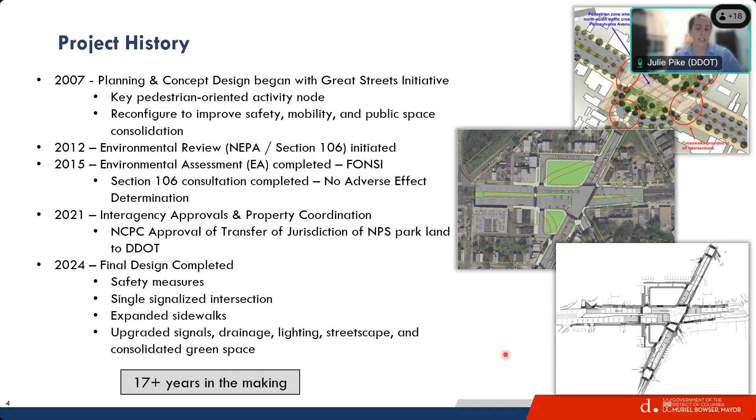So in the current design, this removes the diagonal roads and consolidates the traffic into one signalized intersection. By removing the roads to the North and South Square parks, we can create usable park space, and the project enhances safety for pedestrians, transit users, motorists, and other users of the intersection. This reduces cut-through traffic and has general benefits for residents as well as people moving through this intersection. We are also doing bulb outs to shorten crosswalks - some vital, key, important safety improvements.

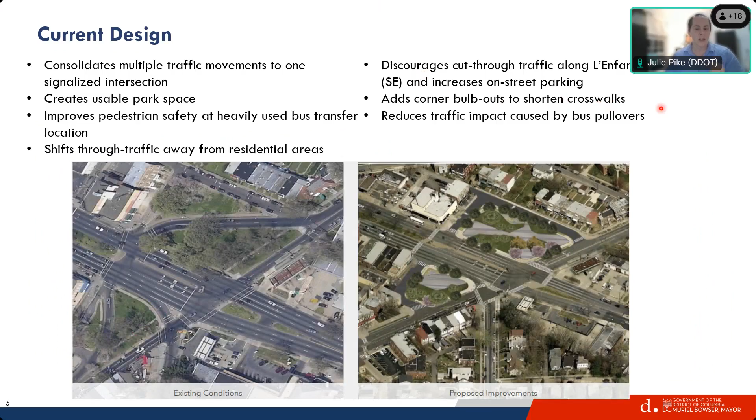So to continue the project timeline, we'll step into fall 2025. The design was years in the making and finally ready to proceed with construction. At the same time, we recognized that there was some additional information available for this intersection, especially considering recent fatalities and other crashes in this location. We used this opportunity to evaluate the project to see if there were any additional adjustments that could be made to the design to optimize safety and increase operational capacity.

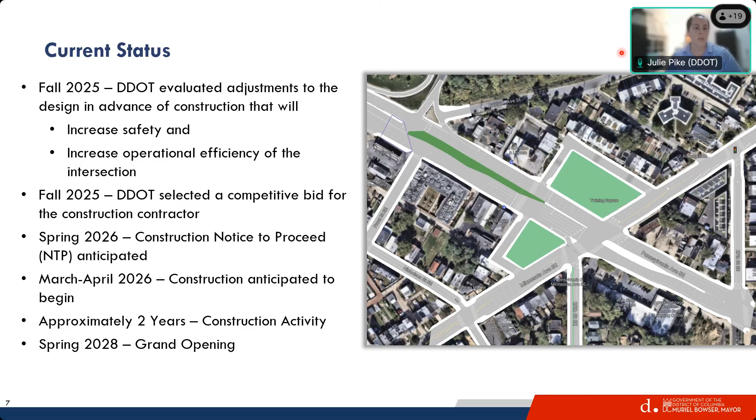Christine will dive further into those evaluations, but while the evaluations are underway, we have selected a competitive bid for the construction contractor and are moving forward with construction procurement. In the spring, we anticipate construction notice to proceed, and we expect sometime in the March-April timeframe that you will start to see improvements being installed in and around the intersection. The construction is expected to last approximately two years with a grand opening in spring of 2028.

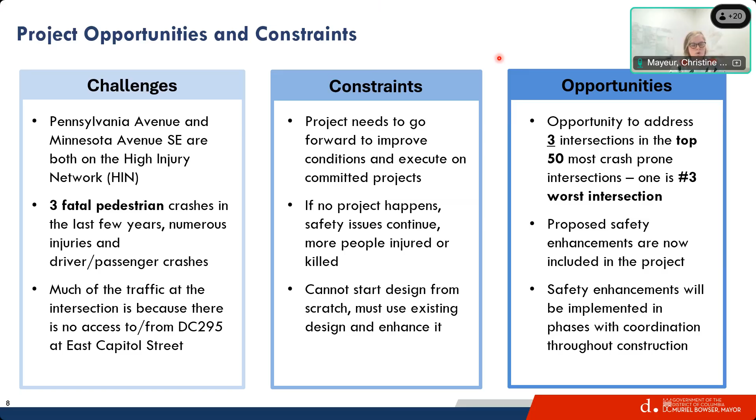The proposed safety improvements are now included in this update to the design, and safety enhancements will be implemented in phases with coordination throughout construction. So I want to walk through what those design enhancements are. Here's an overview, and we'll go in order.

First, starting with the crossing here at L'Enfant Square, where the bus stops are near L'Enfant Square and Twining Square. Then a new crosswalk we're proposing at Prout Street, number 3. Numbers 4 and 5 are related to the access management we're doing for 25th Street. Number 6 also supports all of this work by adding a new signal here in the long term.

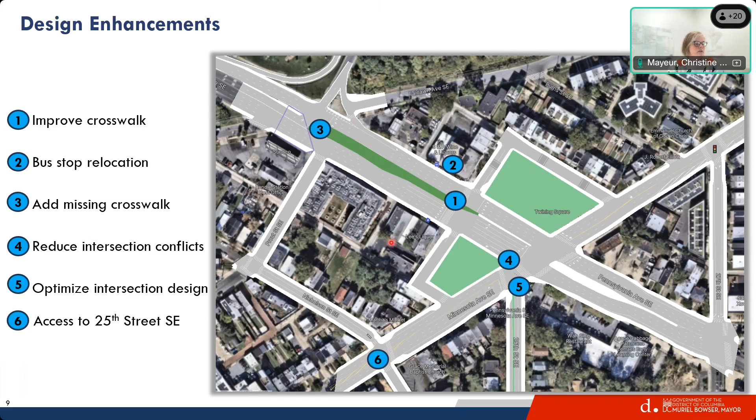Taking these step by step: number 1, in our current plan, before we reassessed the location, we had a crosswalk that was offset, with multiple steps for people to cross the street. The bus stops stayed where they were in these more constrained sidewalk locations.

In the revised design, we're straightening out the crosswalk so it functions in one single crossing phase. Riders trying to get to and from the bus stop can cross the street all in one signal phase, instead of waiting in the median section. We're proposing moving the bus stop to the other side of the park, the expanded public space, to allow more room for pedestrians and bus riders to wait.

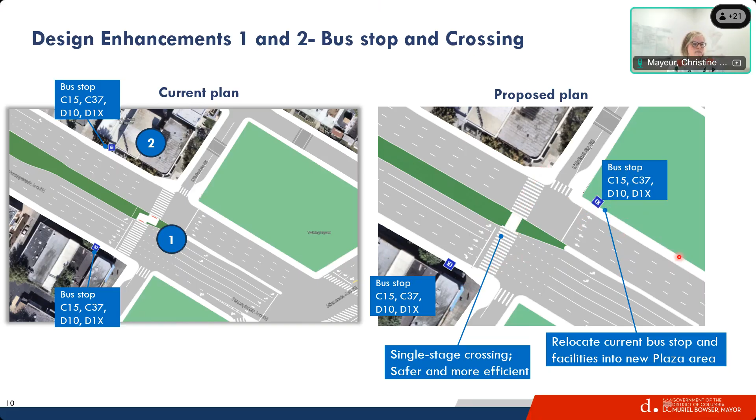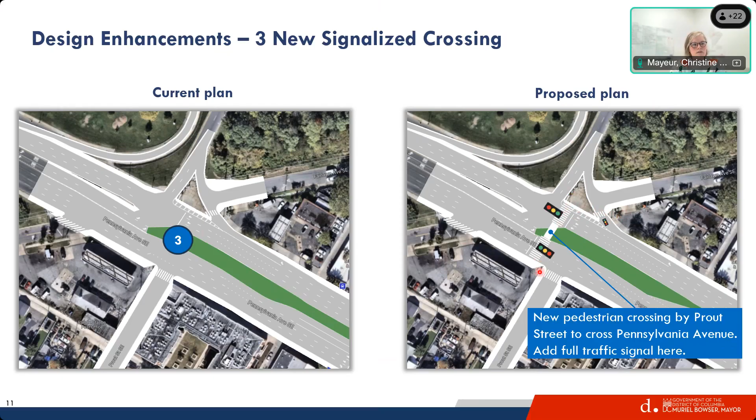In the current plan, we did not have a signalized crossing for pedestrians at Prout Street. In our revised plan, we will have that, helping pedestrians from the neighborhood get across the street and giving them another opportunity to cross Pennsylvania Avenue when needed. I also want to point out that we're signalizing the right turn lane off towards Fairlawn and onto the ramp, so this full crossing will be signalized and pedestrians won't have to contend with moving vehicles.

Design enhancements 4 and 5 are focused on 25th Street. Currently you can make the straight-through movement and then a right turn, with the right turn going through where the existing diagonal roads are. Our current plan was to keep that open.

However, taking a fresh look at all the safety issues and crashes, and also resident requests along 25th Street, we saw a lot of requests for traffic calming due to intensive commuter traffic on that corridor. So in the interim we have a couple things planned, but long term you can still make a right turn off of Pennsylvania Avenue down south to Minnesota Avenue. You will not be able to go through to 25th Street, but there are other routes and changes we've proposed to help make that an easier transition for everyone.

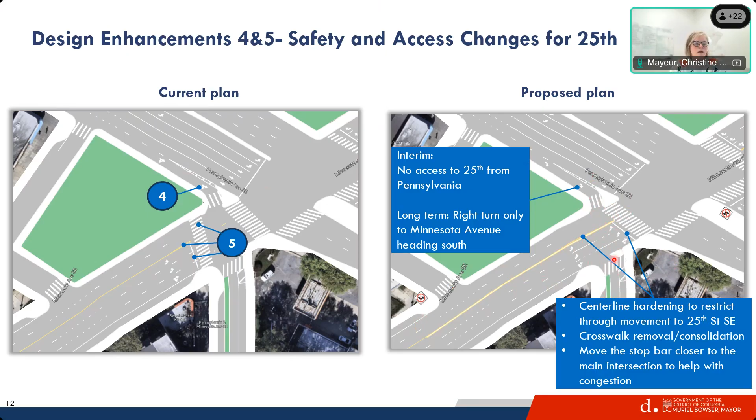This helps reduce the conflicts at the intersection and potential crashes based on the crash history we see here, and will help reduce the number, amount, and speed of traffic coming down 25th Street.

So this is what the short term will look like. What you'll see probably in the next few months is closing off of this turn lane down to 25th Street. We'll be blocking that off temporarily until the redesign happens on this side. But drivers trying to access Minnesota Avenue southbound can still take the diagonal down.

Once construction starts over here and the two-way operation is active on Minnesota Avenue, conditions will change. We're doing this because of the crash history here and the complaints and issues residents have noted to us on 25th Street. It also helps as a win-win with congestion, helping with the concerns we've heard about congestion at the main intersection of Pennsylvania and Minnesota.

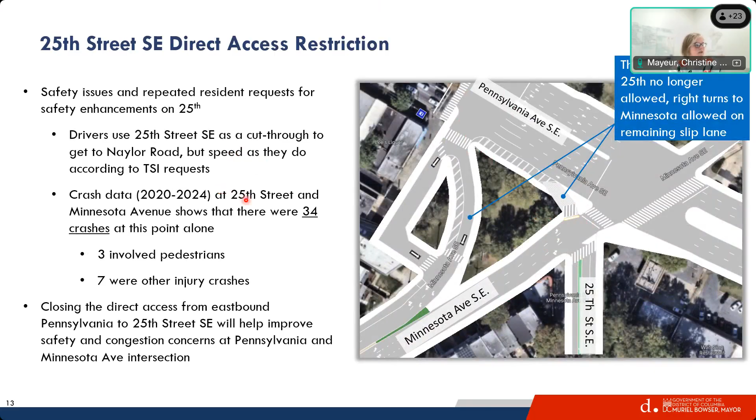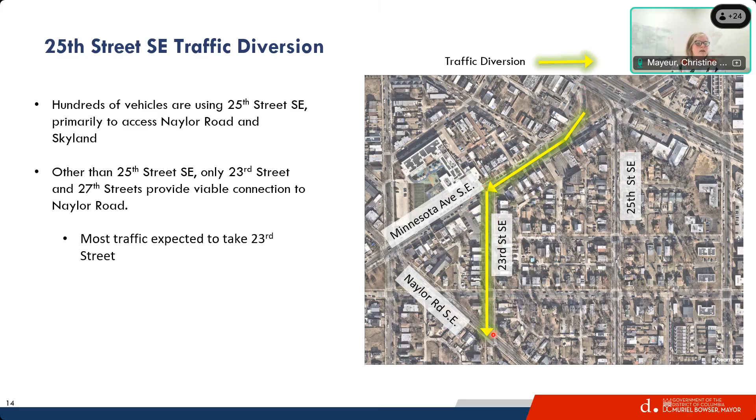So in looking at this closure, we did examine the most likely routes for traffic to divert. Lots of this traffic that's currently taking 25th Street is trying to get to Naylor Road. There's two paths these commuters can take: 23rd Street or 27th Street. Noting there's a couple signals they'll need to go through, the most likely short-term routing will be through 23rd Street south to Naylor Road, then down to Skyland.

So to accommodate this traffic so we don't increase the backups on Minnesota southbound, we are changing up the signal phasing here at 23rd Street, adding in a dedicated left turn lane, and adjusting the signal so drivers have a dedicated time to make a safe left turn down 23rd Street.

For any of the access needs at White and Nicholson Place, in the long term we're looking at installing a signal at White and Nicholson Place, and then converting Nicholson to feed Minnesota Avenue, versus its current condition where it goes away from Minnesota Avenue.

To do this, there's some off-peak parking, about 5 spaces between the bus stop and the intersection, which we'd remove so we can install this turn lane, while maintaining parking on the north side as much as we could.

With this, we will need to reroute the D10 bus. This consolidates service on 27th Street heading southbound and institutes new stops along the corridor.

So the bus will make a turn down 27th Street, turn down R Street, and then back to 25th to reach Naylor and continue on its path. Parking will be removed for these new stops and to accommodate the bus turns, but parking will be restored where the previous stops are being moved. 8 total parking spaces are needed for this bus reroute, and we've worked with WMATA, run some bus tests, and it works.

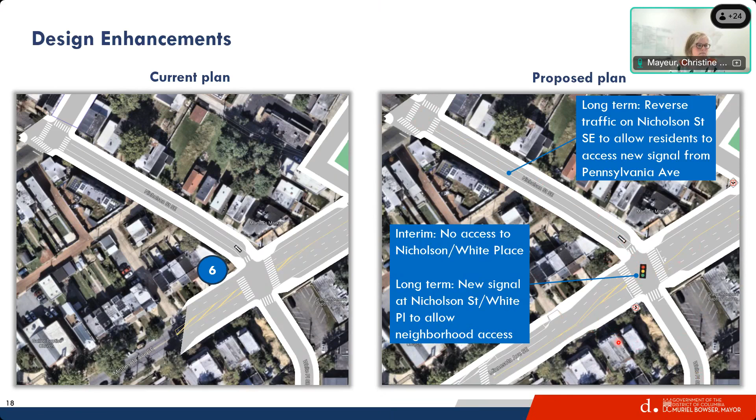Here's just a visual of that routing. Turning right off of Pennsylvania onto Prout Street, then converting Nicholson, which will then feed Minnesota Avenue with a signalized intersection. Through that signalized turn, residents can then access 25th Street this way or come through White Place.

Okay, I'll pass it back to Julie.

Thanks, Christine. So these are design enhancements that we are proposing for the Pennsylvania-Minnesota intersection project. These design enhancements may be refined depending on stakeholder and community input. We are still designing some of these, so there may be some changes.

The construction schedule is currently under development, so more information concerning the closures and impacted blocks will be coming as the construction contractor continues to develop their schedule. We do expect construction activity to continue for approximately 2 years. Because this is a high traffic volume intersection, expect longer than normal delays, and we will work to ensure there are proper warning signs and maintenance of traffic during construction.

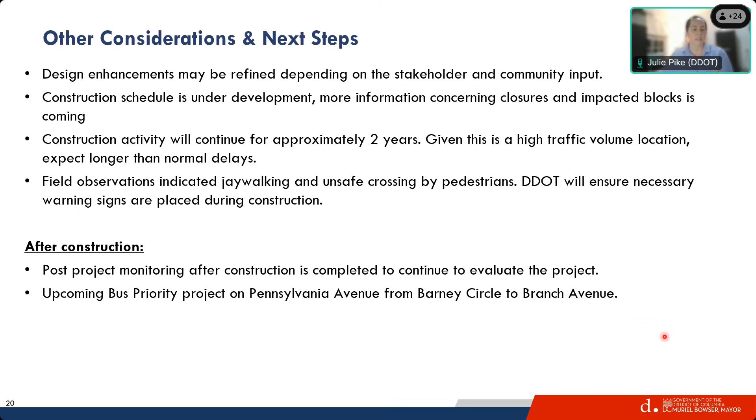After construction, looking a bit more into the future, we will be doing post-project monitoring to continue evaluating the project and how it's performing. I also wanted to note there is an upcoming bus priority project on Pennsylvania Avenue from Barney Circle to Branch Avenue that will cross through this intersection as well. That's an upcoming separate project.

And then we have some upcoming public outreach. We have an in-person public meeting this Saturday at 11 a.m. at Boone Elementary School. And then for construction, there will be separate continued construction updates as well from the construction team before and during construction.

So we expect to have neighborhood flyers, media traffic advisories, door knockers, e-newsletters, digital updates, and updates at ANC meetings before and during our construction.

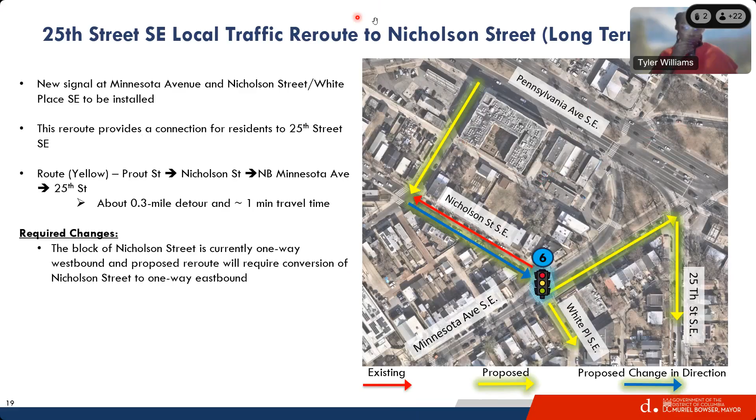I noticed that on Minnesota and Pennsylvania Avenue, if you're on Pennsylvania and you try to make a right onto Minnesota, there's a mini mart on the corner. There's the post office and some stores there, and then there's the liquor store. And one of the big problems I always see that causes congestion is that people stop in front of the liquor store just to make a quick run, right on Pennsylvania Avenue. It's not a designated parking space, it's not like it's officially a parking spot, but it happens all the time.

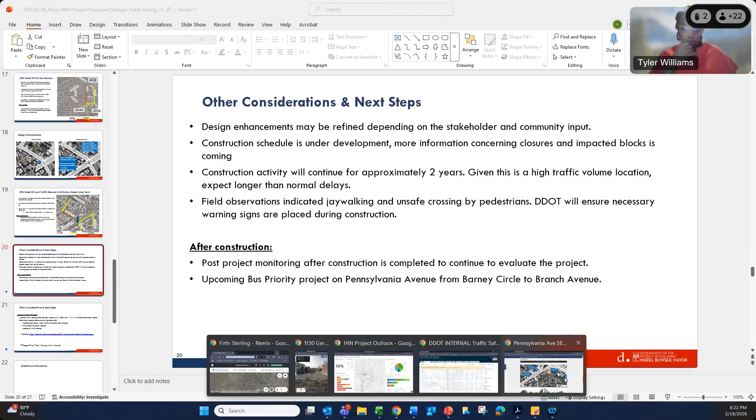I think that's one of the big concerns in that area: if you want to make a right on Minnesota, not only do you have buses that stop on the corner to pick up bus riders, but then you also have pretty frequently just people that are pulled up and parked there. So I don't know if there's a solution to that, to perhaps consider parking enforcement. I don't know, but I do think it's a big issue, exactly where you're pointing at on the map, where the post office is and there's the bus stop adjacent to it.

And then the liquor store, I think, is like two businesses down. And right there, right before the alleyway, is where cars line up, put their hazards on, and everyone else has to kind of figure it out. It creates a hazard for pedestrians because people try to swerve around and try to beat the light. And if you don't know the area well, you get confused going from turning onto Minnesota to then going up.

I think, what is it, 20? What's the other street you can go on there? Exactly, that green line there. What street is that, 25th? Yep, and so sometimes people get confused, and you're right, it is a danger there because not only do we have a lot of pedestrians in the area, but if you know the neighborhood, you've got a little bit of everything going on in that little park there sometimes, so you really have to consider that as well.

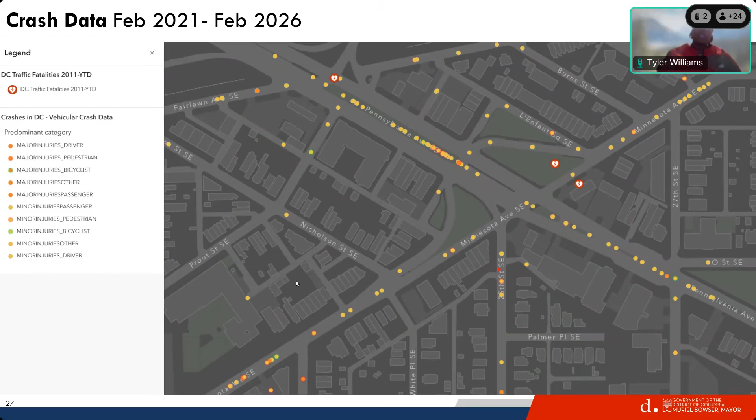I look forward to getting the link to the data. And Ms. Marsh, specifically about the BP gas station, part of the design, there are some openings in that median that's on Pennsylvania Avenue, a few lanes away from the gas station that people can typically cut through. We're actually closing those gaps, so it'll be a single connected median. That's one of the key safety improvements there.

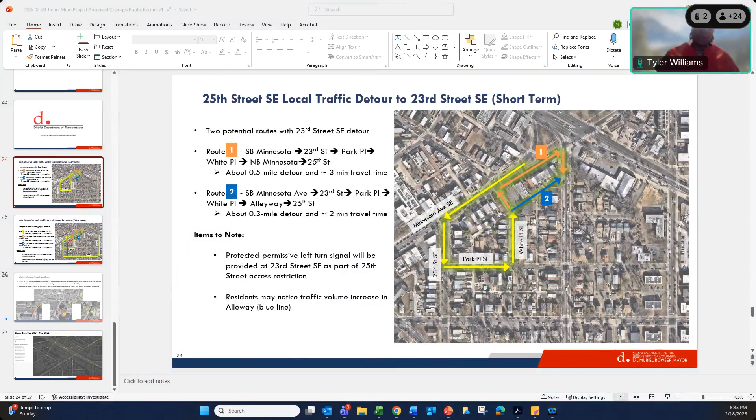I'm sorry, let me get a clarification on that. You're closing the gap where L'Enfant Square is, correct? That's what I thought I read in the rendering. That's correct. But also this white median right here on the screen.

Okay, you have to be more descriptive because I can't really see that. That's Pennsylvania Avenue median, correct? Correct. Yep. So to the left is Minnesota, to the right is Maryland, it's like going towards Maryland.

So the crash occurred with someone, they were cutting through the BP to come from Pennsylvania to Southern, or to Minnesota, or from Minnesota to Pennsylvania? It was, they were traveling from Minnesota out to Pennsylvania, coming through the gas station that way. Okay, so they actually were, yeah, I mean, that's multiple illegal moves because it's one way at that point.

But I don't know, I don't see how closing that median is going to lessen our traffic issue, given the mess that y'all made with those flex rod things or whatever. I just can't envision this. I just feel like this is just a spend-the-money project.

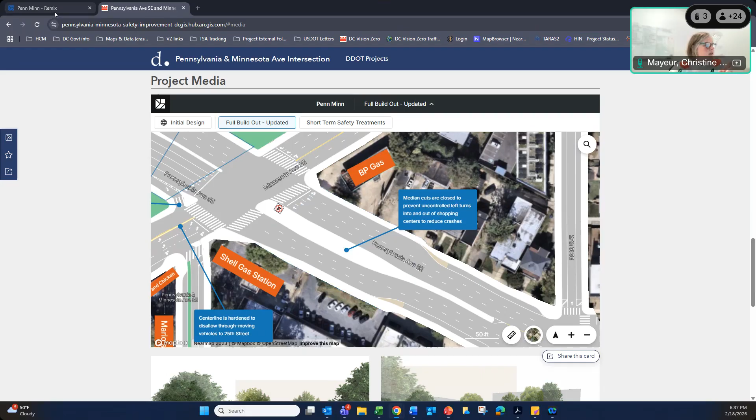So I'll speak to some of the safety improvements around this median and the reason behind it. When we leave the median open, how it is in existing conditions, let me see if I can pull up a map. Okay, I'm gonna zoom in here.

So closing those medians helps reduce the amount of crashes or conflicts that happen along Pennsylvania Avenue. We're hoping that this piece of the project will help reduce the crashes we see of people crossing over and trying to make those turns.

Well, I can see that rationale. I'm just not understanding L'Enfant Square. I have a major issue with that.

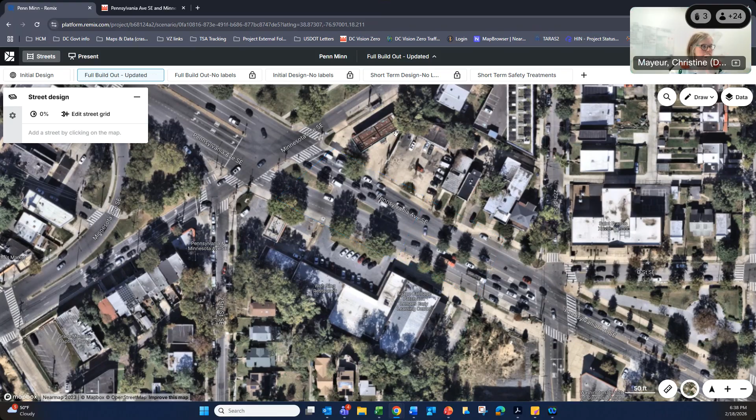Is the issue with the closing of L'Enfant Square, creating just one singular plaza? Yes.

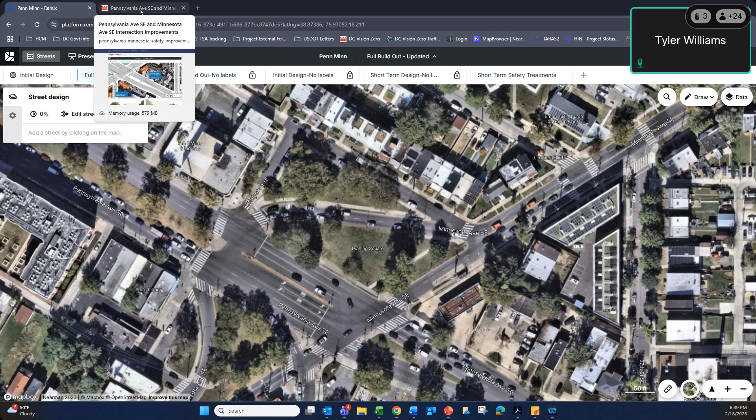Okay, you mind elaborating? I'm sorry. Do you mind just as a last point, elaborating on that a little bit more, and then we have to get to other questions? Yeah, go into the other questions. I've got an urgent thing happening here, so go into the other questions. I'll circle back. Okay. Thank you, I hope.

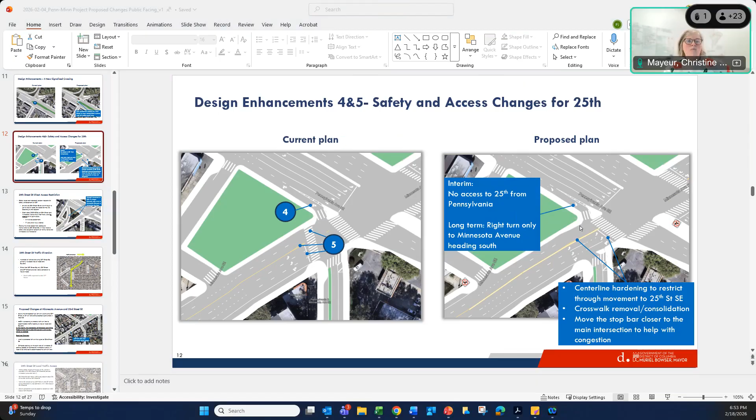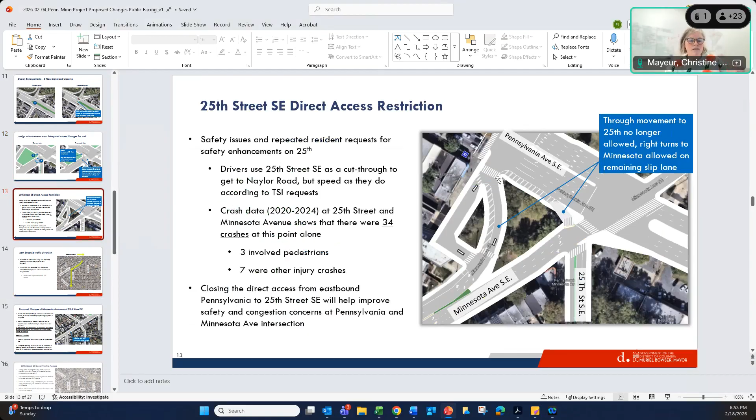We think that it's likely people will come down and, during the temporary work, might cut through White Place. So we're not changing Nicholson until we install the signal, that way those two can be coordinated together. In the interim, Nicholson will remain one way away from Minnesota Avenue, and we will put in some bollards to block people from making left turns and trying to cut down White Place. We do want to focus that commuter traffic on locations that are more equipped to handle it. Like you noted, White Place is really narrow, Nicholson is as well. So we want to focus all that commuter traffic on 23rd. If they have to come through this area, they're doing it via 23rd, not using White Place.

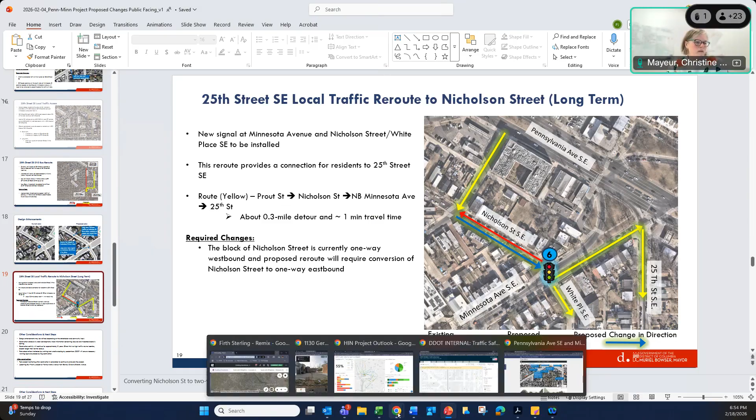Okay, because I just want to stress, I live at the corner of White and Park, and I definitely notice whenever something happens on Minnesota, people coming down 23rd Street always try to cut off of 23rd and then go through Park and White Place, and they come flying through there on this narrow street. We actually got speed bumps installed on both of them to try and slow people down. And I worry that people will continue to try things like that. Yeah, like Julie noted, we will be monitoring this during and after construction and perform an evaluation of the project afterwards, like we have been doing with all other corridor and high injury network projects.

So we'll be looking at these locations as well and also monitoring. We have the TSI program, we do still prioritize locations through that for other traffic safety improvements, but yes, we'll monitor all of these.

Okay, I want to speak for my wife and say that she will be so excited about that traffic light at Nicholson, because almost every day she goes down to the river, and every day complains about trying to get across those crosswalks and people stopping for her. Nobody stops for her. So we're huge fans of that stoplight there.

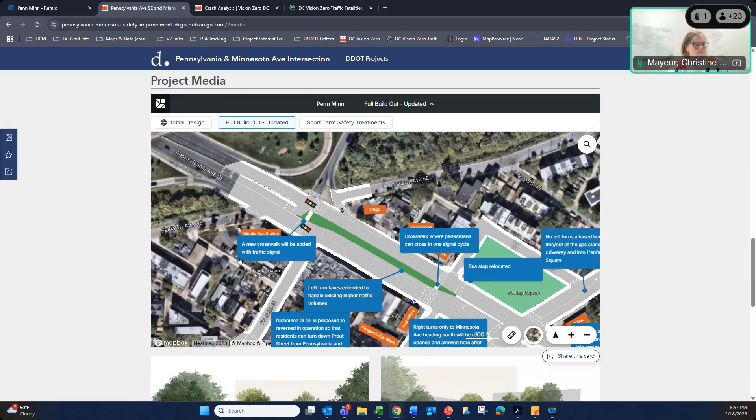Okay, last question. I bike up 25th with my toddler on the way to daycare, so I'm happy for traffic to be even less on that street. But I wonder, 27th already backs up a ton, especially during morning rush hour when people are coming down from Skyland and Hillcrest trying to turn onto Pennsylvania. So I wonder, if more traffic gets diverted onto 27th, can it handle that much?

We did a small area analysis and it seemed like northbound traffic probably wouldn't go up to 27th because, as you noted, it's already stacking up in peak hours, but may instead route down Naylor and use other larger streets to navigate through. We did notice a very high volume of left-turning traffic going north on 27th trying to access Pennsylvania Avenue, so we're trying to extend that middle turn lane, which currently can only fit about two cars, to have a bit more storage. Ultimately, we wanted to balance parking removal with traffic operations.

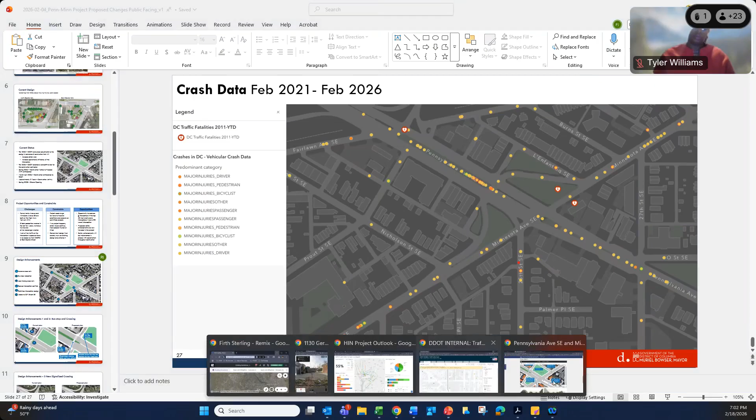Minnesota Avenue is a parking lot, right? It has become less safe since your last DDOT rebuild. So I have very little confidence that you all are going to do anything in our best interests. But I do have a specific question. You all are redirecting traffic onto streets that were not built for heavy traffic. You are also redirecting bus lines onto streets that were not built to have these heavy buses running up and down. Has there been any vibration monitoring in these communities or inspections of these homes as a result of this? That's the first question.

I take it by your silence that you have not done vibration monitoring. Thank you. Because these homes were not built for that, and the infrastructure underneath, the depth of the roadway, was not built for buses to be running up and down the street, as well as the increased traffic. And these homes will be damaged. I would advise anyone who has a home on any of these streets, 23rd Street, White Place, any of them, get your home inspected so that you can sue when the cracks start appearing. Secondarily, have you done a traffic impact analysis on these smaller streets?

I'll take that one. In looking at the redesign pieces that we're proposing here, we did look at the traffic impacts and where they were more likely. So that's what we're showing here, is that most of the traffic is likely to go down 23rd Street.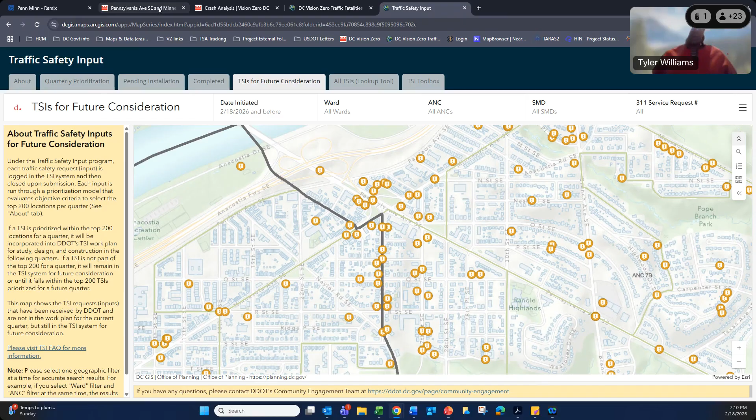Thank you. Now, also, I notice you're going to be closing up some of the cut-throughs, and you're going to make it much more difficult for individuals to get to gas stations, to get to stores, etc. Have you looked at the financial impact on the businesses in this area with all of these changes?

Which businesses are you referring to specifically? You're talking about Mario's? And there's Mario's, absolutely. You're talking about the gas stations, both the BP and the Shell. There's also usually during the summer a flea market across the street right next to the BP gas station. There are several businesses along there that will be negatively impacted, as well as the dentist and the Thai Orchid. All of these things are going to be negatively impacted by the plans that you all have.

Actually, one of our chief transportation safety engineers would like to chime in with the response.

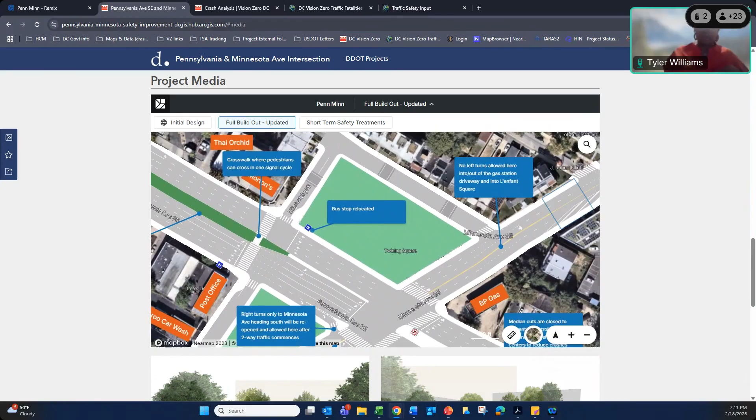Yelima, you're welcome to unmute. Hello, can you all hear me? Yes. Hi, I'm the Deputy Director of DDOT. Thank you so much for spending the time and actually coming and listening to us.

I would like to address the comment about impact to businesses, and I'm assuming economical and financial impact. DDOT's primary goal is to make sure that all modes of travel, especially the vulnerable road users who are walking and biking, are safe. That's our primary goal. We are not in the business of ensuring financial impact. While we consider that, that's not our primary goal.

In this case, one of the fatalities that happened, you're right, it did happen on a property, but it happened because somebody was trying to cut through the gas station to avoid traffic going from Minnesota to Pennsylvania. So this project will close certain medians that will not allow this illegal behavior. Yes, would it reduce the total revenue for the gas station? Absolutely, but that's okay. We'd rather not have people die. Thank you very much.

You said you're going to continue to monitor this over time. I need you to help me understand what the continuation of monitoring is. Because when we protested the narrowing of Minnesota Avenue, I was the lead person for this, and I pointed out that it was going to cost somebody their life or their property. We've had 3 homes burned down due to the fact that fire departments can't get through. Nobody's ever come back. We've circled back, and we get nothing. So what guarantees do you have, kind of like the Wendy's circle, which is still a mess after the fact, that you're actually going to change anything if it doesn't work?

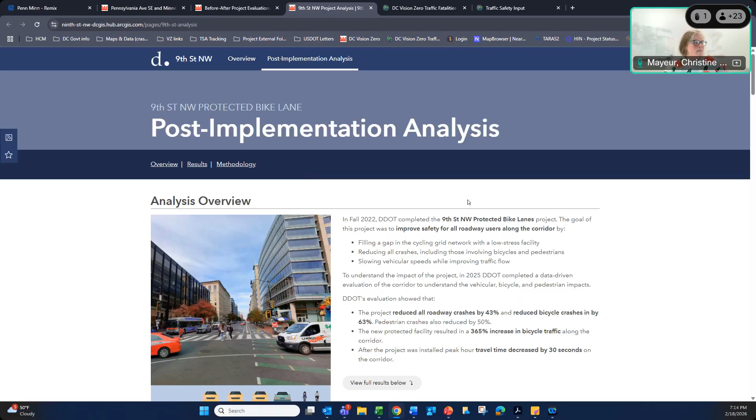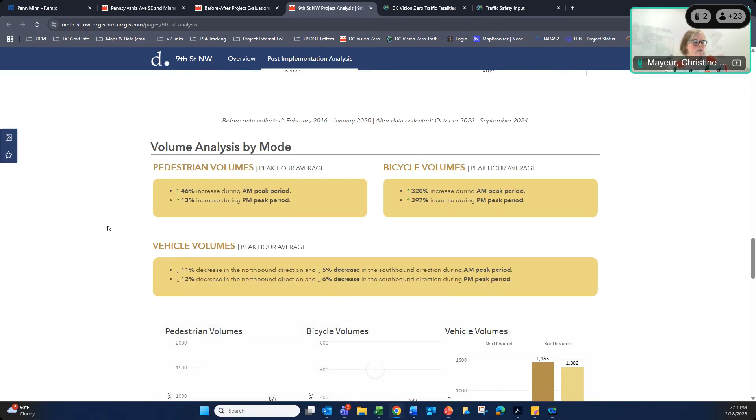Go ahead and pull up our before-after evaluation hub site. This is a website where you can look at all the projects where we've completed a study of before and after conditions to get a sense of what we're looking at. So I'll pull up one. We look through crashes, ridership, and what traffic conditions look like before and after. If it's including bus facilities, then we'll include ridership or bus speeds, and so on. It's a pretty robust process, and we'll be looking at it through all of these factors. I'll add the link to this website in the chat.

My last comment is this: I know things tend to look good on paper, but everything doesn't always work. I've spent a lot of time in school and I know theory backwards, forwards, and sideways. But I also know that things can go bad very quickly, and no matter your best intentions, somebody still may lose their life.

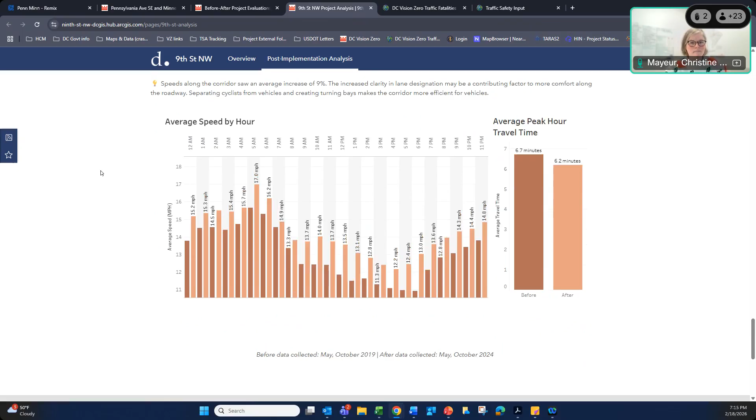Yeah, that's certainly true. We've seen it play out. We can design a road as safely as we can, and a dangerous driver comes through and harms someone. What we're trying to do here is, to the extent that we can affect this behavior and slow people down, force people to act more safely in this very multimodal, transit-heavy environment. That's our goal for this project, and then to further build on that with the bus priority project that's coming through.

Okay, well, I thank you, appreciate it very much. I'm sure the businesses will be glad to know you guys don't care.

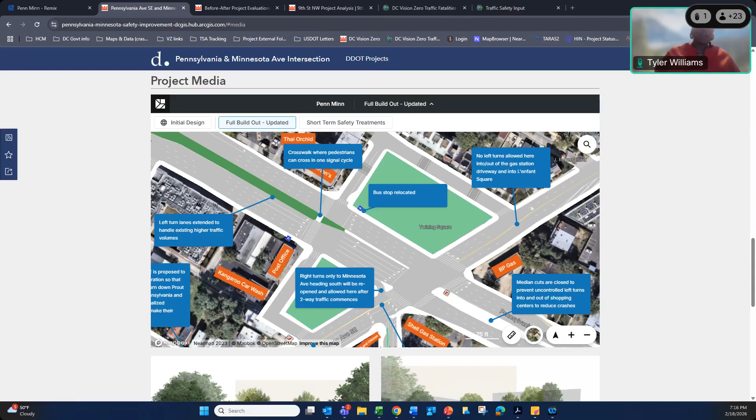Tyler, if you're talking, I think you're on mute. Oh, my apologies. I think there's one more hand raised, and I think I just gave them permission to unmute. I believe the name is Tuan Bo. Hello, thank you. Hi, Tyler. How are you? I'm good. How are you? I'm doing okay. Just trying to make this as quick as possible. There's a lot to digest here. There is a lot.

So I can understand Minnesota Avenue. Currently on the south side of Pennsylvania Avenue, I think it's 3 lanes wide, with one being parking available. And I think on the north side, it's 2 lanes in front of the BP. So let me pull up a map for you, wait, okay.

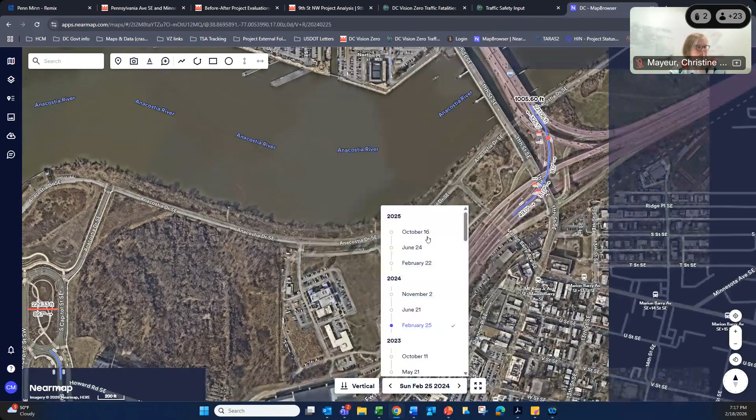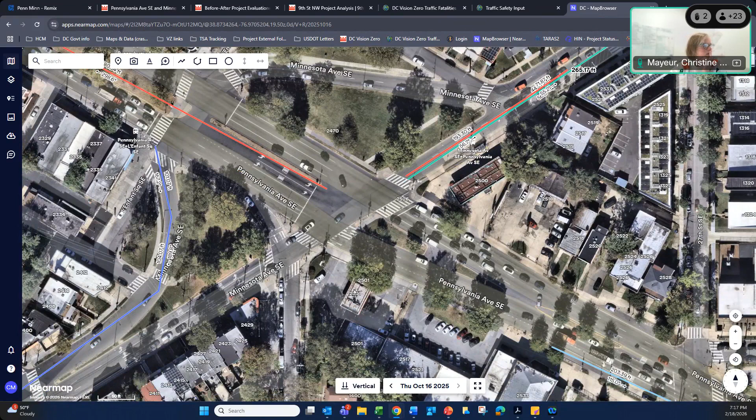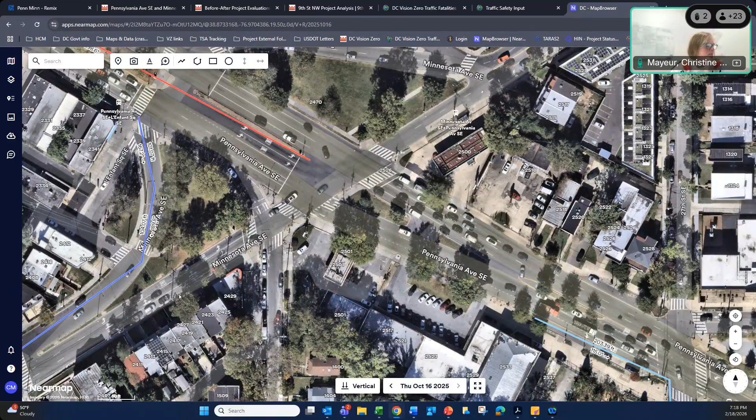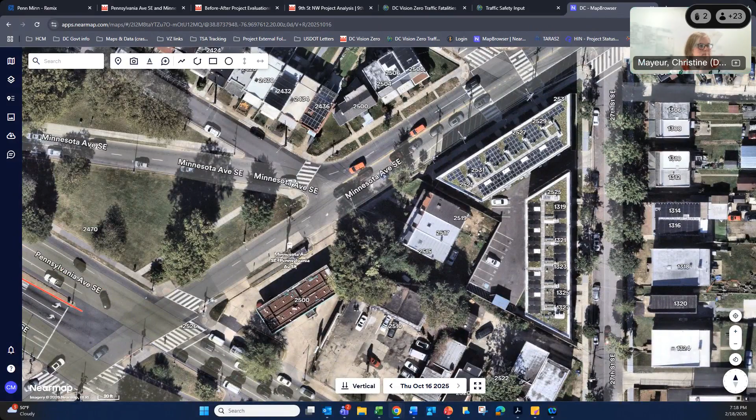Okay, so I have it here. Let me see if I can turn off my lights. Let me know when you're ready. Okay, yep, okay. So on the north side of Pennsylvania Avenue, Minnesota Avenue is 2 lanes in front of the BP. And on the south side is 3 lanes.

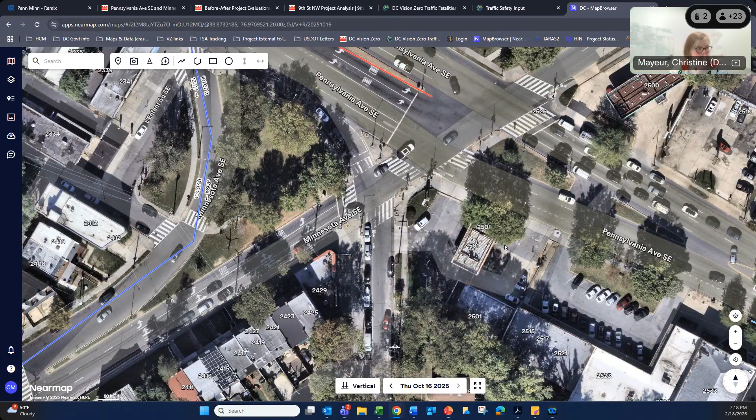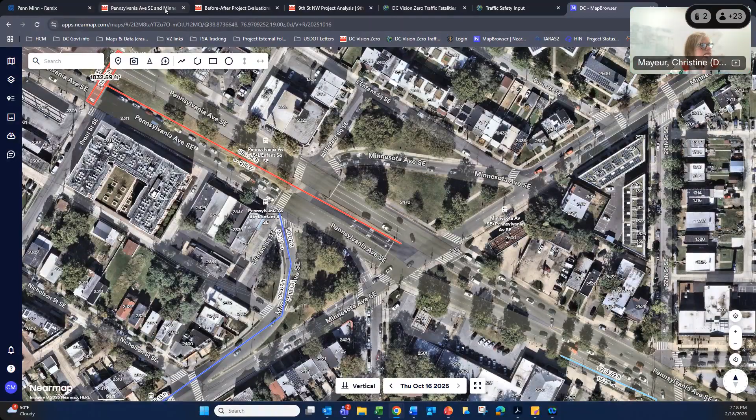Correct, yep. So the new proposal is for Minnesota Avenue traffic to go straight across, able to travel in both directions going straight across. Correct, yes. I just want to confirm, because I can tell by the illustration that Minnesota Avenue is going to be 5 lanes at Pennsylvania Avenue. Yes, that is what the design would have, to consolidate the green space there. The southbound and northbound directions would travel just like all the other streets in DC, having two-way traffic through the intersection for both Pennsylvania and Minnesota.

Right, what I think is 1 lane is going to be a turning lane from Minnesota Avenue onto Pennsylvania Avenue. We're maintaining 3 in the northbound direction. Let me zoom in here if you can see—this is the future design. So 2 of them are northbound, going past the Hip Hop Fish and Chicken, would be left turn lanes to go onto Pennsylvania. And then in the southbound direction, it'll be 3 lanes, 2 right turn lanes heading towards Pennsylvania as well. Those will be coordinated with the signal so there's not overlap for those.

So there's no opportunity for someone traveling on Minnesota Avenue southbound to make a left turn onto Pennsylvania Avenue? They can, yeah. We have a southbound through lane and a left turn lane. When we looked at more recent data collected in the fall, we saw that on the weekend there's about 75 people making that turn, and on weekdays it's between 44 and 55 people. So we are still allowing that left turn from southbound Minnesota to eastbound Pennsylvania.

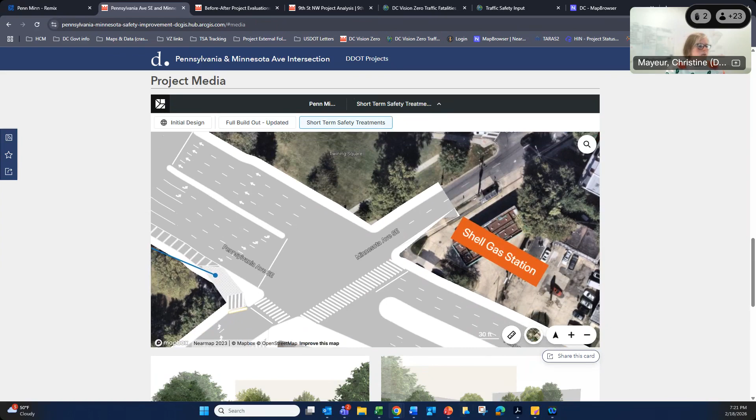And that's 5 lanes going across, if I'm not mistaken, right? That's correct, yes. So that's going to be a considerable amount of chopping done to the park space, to the green space that's already there, including the trees. In order to have 5 lanes, you're gonna have to do some cutting into the park space that's already there, right?

Yeah, that's a considerable amount of chopping.

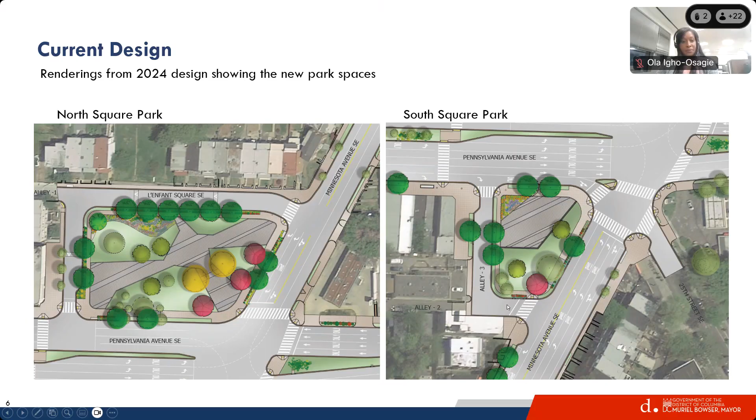All right, my second item is 27th Street, in reference to the D10 bus going on Pennsylvania Avenue, turning onto 27th Street, up 27th Street to R Street to 25th to access Naylor Road. I know you said WMATA did some driving through to test that. However, I know from personal experience driving a large vehicle, it is very difficult to make a right turn from Pennsylvania Avenue onto 27th Street and sit there.

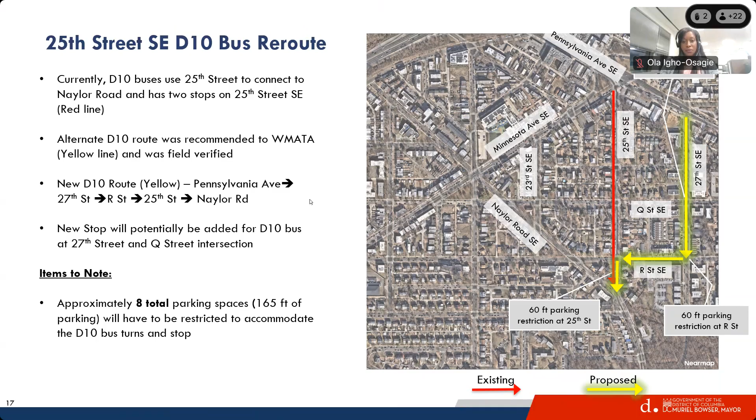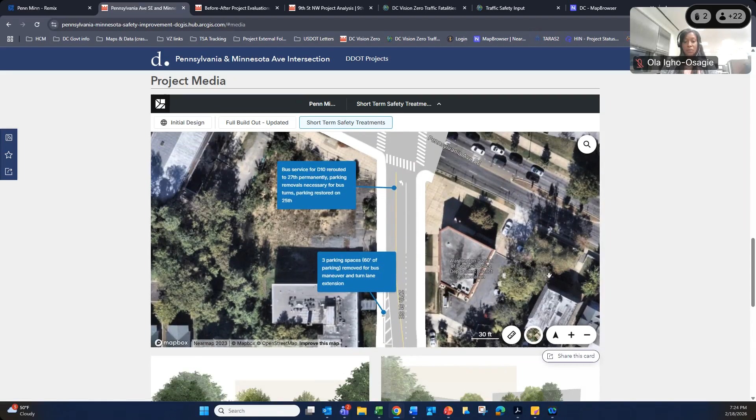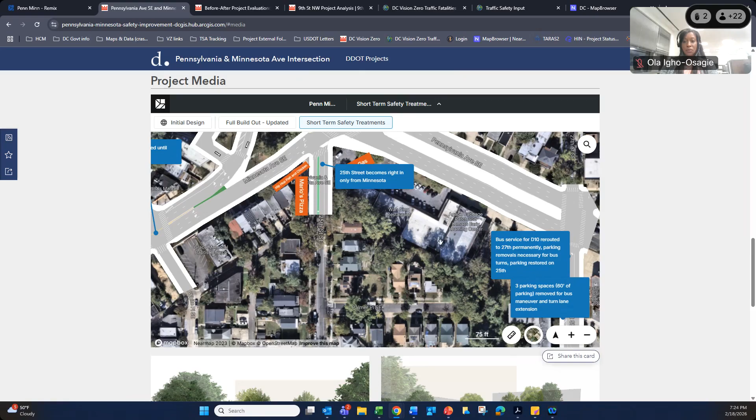Especially at rush hour, while traffic on the northbound side releases so the bus can go through. A resident made a comment about traffic jams and backed-up traffic. In this circuit of 25th, Minnesota, Prout, Nicholson, Park, White Place, it seems as though we're taking traffic away from one community or block and throwing it into other blocks. So you're just gonna have traffic somewhere else, just not on that particular street. What are we doing?

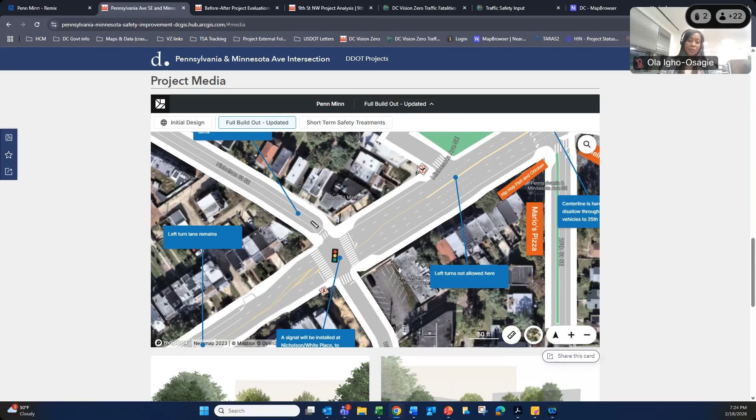The turn from White Place onto Park is very, very tight. But from your plans, we're going to open up the floodgates so traffic can go that way and make that turn at White Place and Park. Park is a one-way, it's so tight. If someone parks there, we're creating something we're not prepared for. And I say 'we' because I'm a neighbor. We... hashtag, what are we doing?

Minnesota Avenue southbound to Pennsylvania Avenue — someone wants to make a left turn onto 25th Street to go up the hill. Can they do that? I don't know. Will they do it? The answer is yes. By hook or crook, they're going to do it.

295 northbound, off-ramp to Pennsylvania Avenue, right before you get to Prout Street — people trying to access the far left lanes onto Pennsylvania Avenue, it's like dodgeball. The same as the off-ramp from the Southeast-Southwest Freeway onto Sousa Bridge, it's the same thing. So why not put a traffic light there so cars don't have to play dodgeball getting off 295 northbound onto Pennsylvania Avenue? I know we talked about fatalities, but we didn't talk about the accident right there three weeks ago — a car overturned. Playing dodgeball. Hashtag, what are we doing?

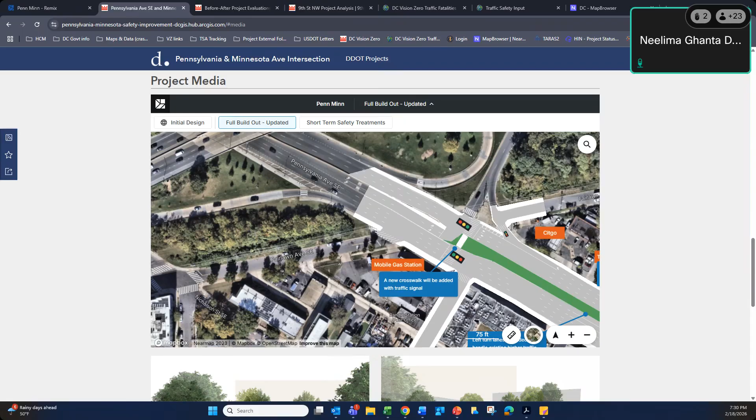However, sometimes that is the option we have, because if you look at—Christine, can you pull up what the intersection looks like now—Minnesota Avenue, 25th Street, Pennsylvania Avenue, there are two intersections essentially at one location, and the amount of crosswalks puts pedestrians in such a vulnerable state at a very confusing location where a lot is happening. So we want to reduce the amount of activity in one location, because it's just too much for a driver, pedestrian, or biker to understand. We're trying to make it less confusing, more aligned with what you'd expect at an intersection. Also, the pedestrian crosswalks are more consolidated and not as slanted, so it is an improvement by moving things around to make it slightly safer. But it's not a perfect solution—we're aware of that.

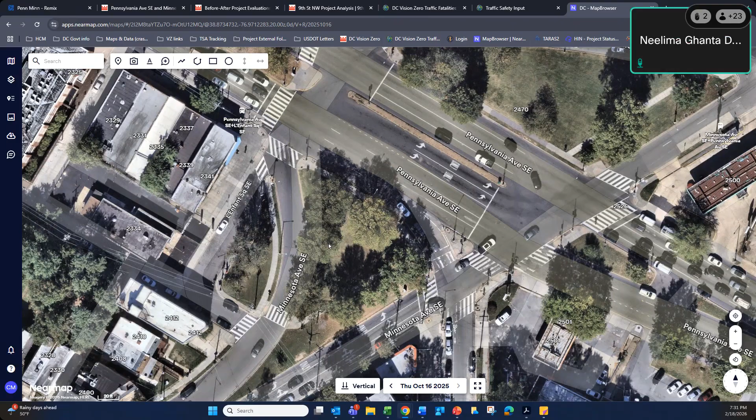Okay, thank you for your question, Mr. Bowe. And we have time for a few more questions. I see Commissioner Aaron Harris has his hand up.

You should be able to unmute now, Commissioner Harris. Hello, good evening, thank you. Can you hear me? Yes.

All right, thank you. So my first question is: is DDOT operating as a community partner? Yes, we strive to operate as a community partner. I'm asking because as I've listened over the last hour and a half, I've heard a lot of reasons why you were not able to engage the community for such a long time. But at the same time, I heard a lot of conversations about engaging WMATA, PEPCO, and Washington Gas. So if there were impediments to engaging the community, why weren't there impediments to engaging the agencies? That's the first thought that comes to mind.

And after you engaged these agencies, as the scope of the project began to change, how come people weren't reached out to? I heard a lady earlier—I forget her name—say she spoke with you guys back in 2018, so you're aware of her. It sounds like at least one person on the panel was very close to a member of her community who came to speak. So I'm trying to figure out how you're striving to be a community partner, because from what it sounds like from most of the people who've called in or are listening now, they're being dictated to as to what's happening. Can you help me understand how you're striving, and how this project has gone this way?

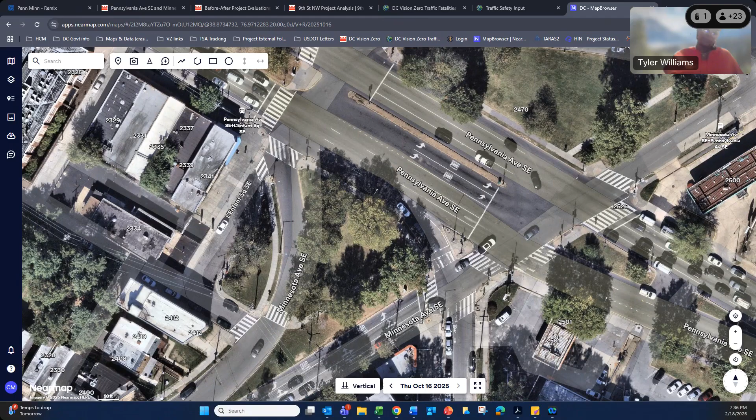So it sounds like what you have is a closed process. You engage initially, and then it seems like the doors have closed while all of these things are going on. Because what comes to mind is when WMATA, PEPCO, or Washington Gas finally get back to you, at bare minimum an update could be available that this has been approved or this is what's happening. Dashboards are very popular with a lot of district agencies, where people don't have to call or email you, they can track it because they're concerned. So at a lot of DDOT meetings, I often hear apologies for lack of communication, and 'we strive to be a community partner and we'll do better next time.' But it rings hollow, frankly.

I understand this is a process meeting where you're explaining what you're thinking about. But from what it sounds like, and correct me if I'm wrong, this project has been decided that it's going to move forward as it is presented. Am I correct?

You are correct. I mean, we are in the notice of intent process, the NOI process. So there is an open comment period where there's an opportunity for very small tweaks, but the design as presented is presumably the final design.

Right, and thankful for what we get. But again, that leads back to my initial question: are you a true community partner? Is that how DDOT is operating? Because what it sounds like is, hey, we've made our decision, you guys can comment on some small things, but don't expect major changes. My real question is, how and when will the community be part of the major decision making as you guys strive to be community partners?

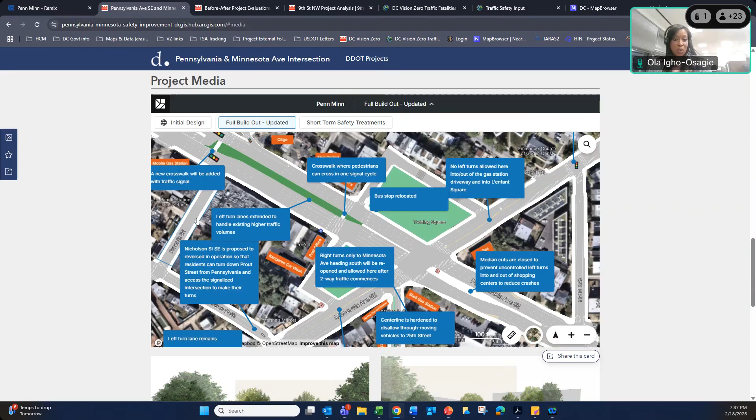Hi, Mr. Harris. Thank you for your comments, and we do feel your sentiments. We go to the community for their input and their concerns as well. That's how some of these safety improvements were even added onto the project. The core project back in 2018, as some residents have stated, they were there, they were a part of it. They even came to DDOT to let us know even more of their concerns, and we were limited in what we could do through the environmental study that was done.

Part of our coordination with stakeholders is to see where their infrastructure is, how adequate or inadequate it is, and if they even have the funding to improve or move it. As DDOT also wants to do safety improvements, this is an opportunity for other stakeholders, utility companies, to say, okay, our infrastructure may be outdated, yes please let us help attach our projects or needs onto this project as well.

So we need to get that organized and have a plan before we go out to the community, because if we go out to the community prior to even understanding what needs to be done, we really won't have responses or be able to engage the community how we want and have their input. Unfortunately, this project had a lot of utility coordination that delayed us going back to the community for such a long time span. It may have delayed you coming back to the community, but it did not delay you from developing a complete plan. That's really the crux of the issue that maybe we won't talk about directly, but that's what I'm trying to talk about.

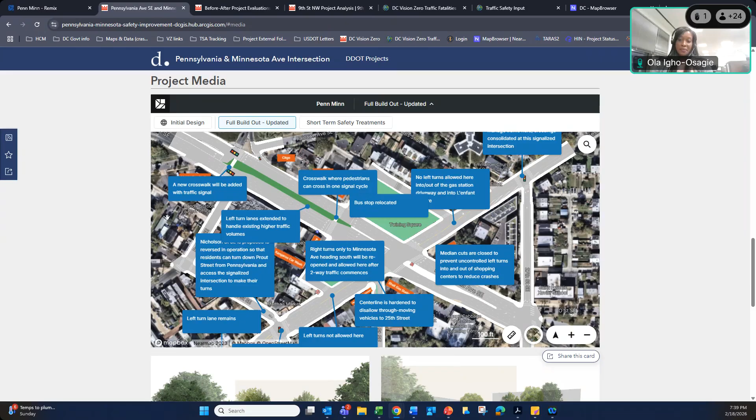I hear you, this is Neelima again. I wish that went differently. I see where you're coming from, I understand. The way we approach this project is, this is a high injury network intersecting corridor. A lot of injuries, severe injuries and fatalities have occurred here, so this is our one opportunity to make it better. We took that opportunity with the additional funds we have for safety, with focus on HIN from Federal Highway. But however, I do see what you're saying.

Ms. Ghanta, I'm glad you chimed in, because two things: 8 years ago, there was a very limited amount that could be done because of certain constraints. Fast forward 8 years, there's very little that can be done because of certain constraints. And in the meantime, this got done. That's interesting. The reason I'm very glad you chimed in is that your callousness about the health of a business was startling. Yes, we can say life is more important than business, I don't think anyone's going to disagree with that. But when you're talking about an area that is not always as economically healthy as other wards, for you to speak that callously about it losing business, what happens if that business closed down and then it's dilapidated, it's an eyesore, etc. It was very telling in your tone when you spoke about that.

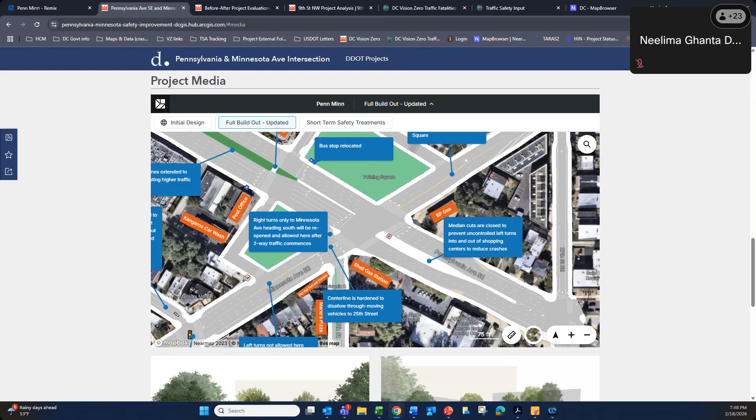I would like to note that at least for the past 2 years that I've been in this role, we have engaged with the fire and emergency management team pretty frequently, and they are people that we get feedback from for all of our projects.

Is that open for us to look at that record? Who did you talk to? It's usually by way of meeting, and I'd have to look back in our records, but it's usually the captain of the fire station and whoever the commander delegates authority to at the district, the MPD district.

Okay, well, we have set meetings at 6D, and I know the last 3 or 4 since Conti left, and before he was there, Habibula was there. She was a female, and that was not what you were saying. That's not what Habibula, Conti, and Taylor said in reference to them being involved.